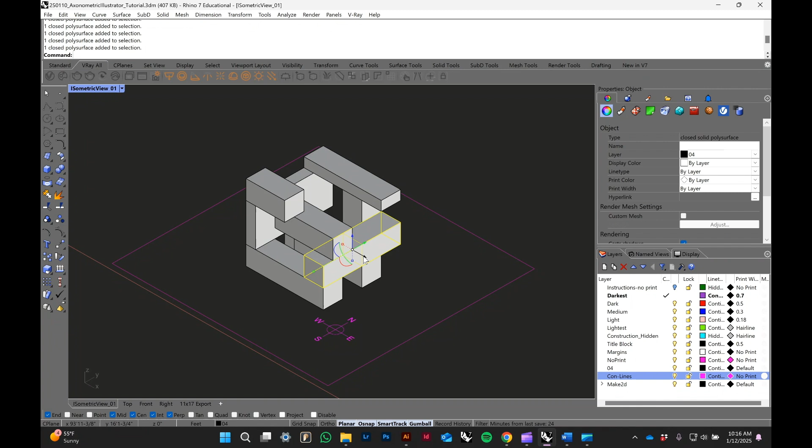But the basic principles are all the same, and it all kind of rests on the Make 2D tool and using different and multiple Make 2Ds. So I think these two objects here are what I want to pull out. So there's a couple of things I'm going to do. First, I'm going to option pull out to make a copy. And I'm going to option pull out. These will be our sort of floating pieces that we are going to use.

And I am going to hide these two objects for now. And we have this base. So I'm going to go ahead. I'm going to select everything. I'm going to do Make 2D. I'm going to call this Make 2D Solid because these are all of the solid pieces I would like to show.

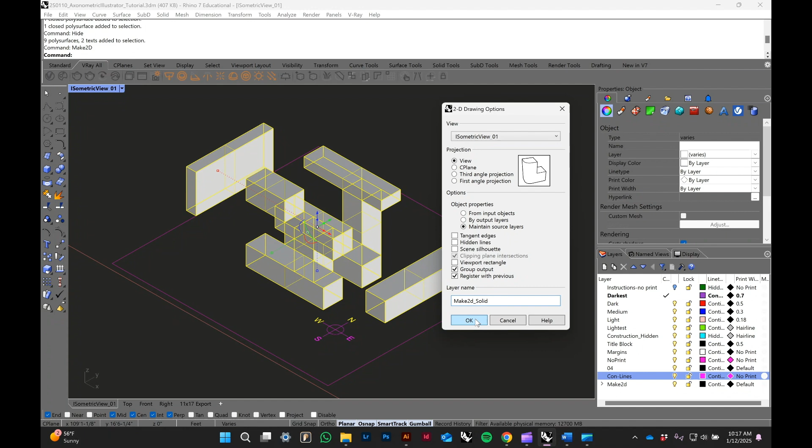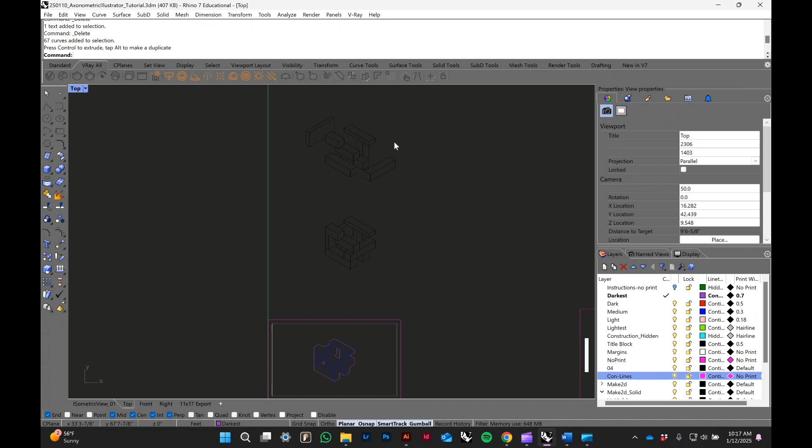We'll go over to top view, and we can see that it is all on top of itself, which is not what we want. So we are going to pull it up and work on it over here. So we got some stragglers happening. I'm going to go back to my isometric view. I'm going to type in show, and I am going to make 2D. Actually, it's a lie.

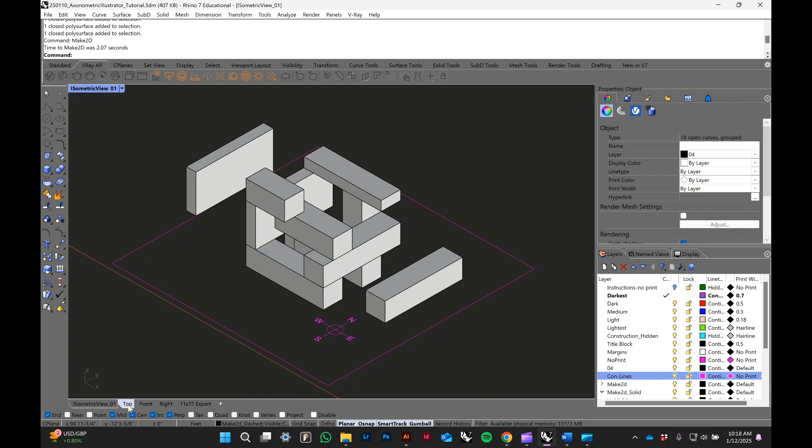I'm going to select these two objects only. I'm going to do Make 2D. And these are going to be Make 2D Dashed. You'll see why in a second. So we're going to go back to our top view. We're going to see these people have moved in, and we are going to simply pull them up on top.

So now, when we come down here, we have three different Make 2Ds. We have our Make 2D Solid, which is the first Make 2D we made. We have our Make 2D Dashed, which is the second Make 2D we have here. And then we have our original Make 2D from the tutorial before.

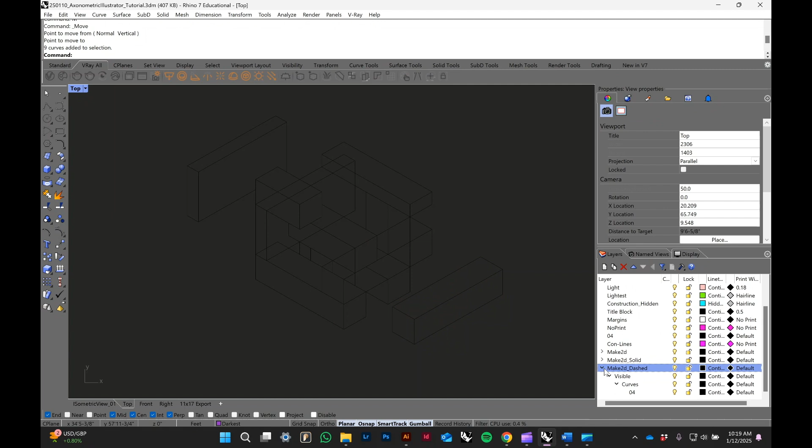So, like I said before, Make 2D is not a perfect system. It will not make the drawing for you. You have to do some work. So what I'm going to do here first is I'm going to work with the Make 2D Dashed. So I'm going to select the objects in layer 04, and I know I want these to be light. I want them to be lighter than the sort of context medium line weight that I used before, this drawing here. So I'm going to put it on my light layer.

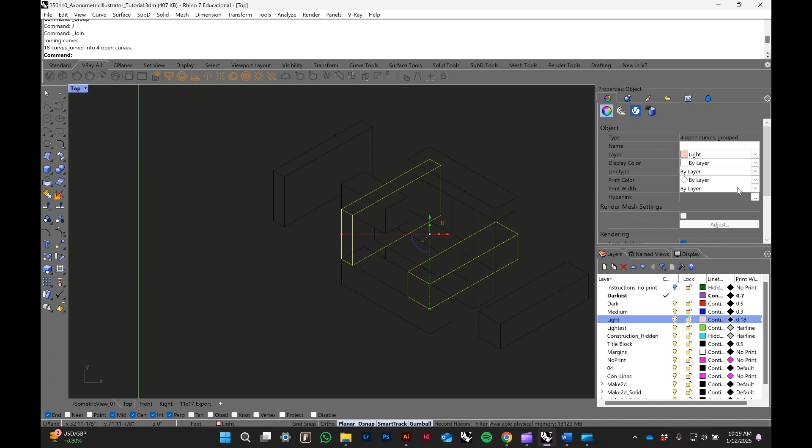I also know that I do want a dashed line. But I don't want a dashed line on the full light layer. So what I'm going to do is I'm going to group these two objects together. I'm going to join all of the lines quickly so we don't have any loose lines in Illustrator. And I'm going to change my line type to dashed. That looks pretty good.

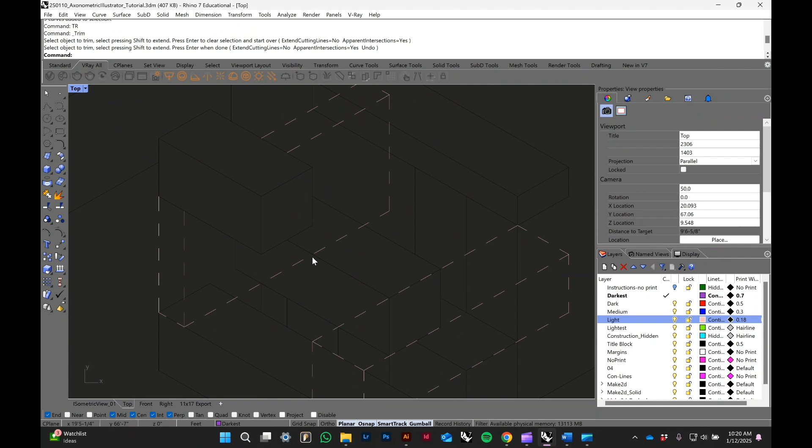I'm also going to come in here and do a little bit of trimming. So the objects that are in front of them, I don't want the dashed lines to show through. So for example, here, clean this up. All right, we're going to clean it up here. And looks like here as well. Okay, that looks right. Same thing down here. We're just going to clean up the lines. Okay, come on.

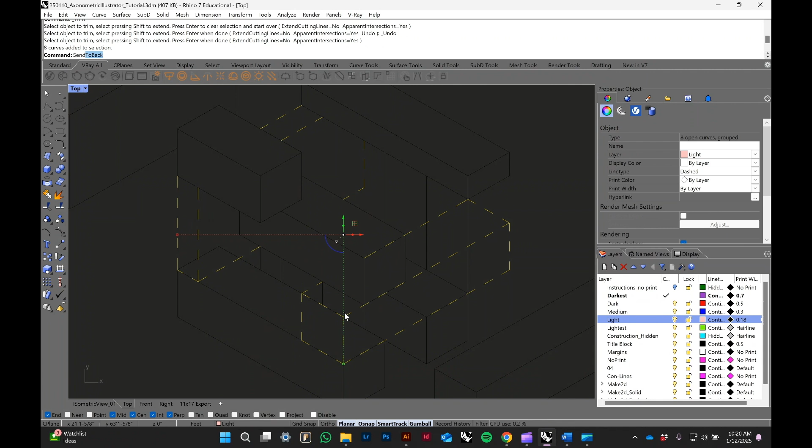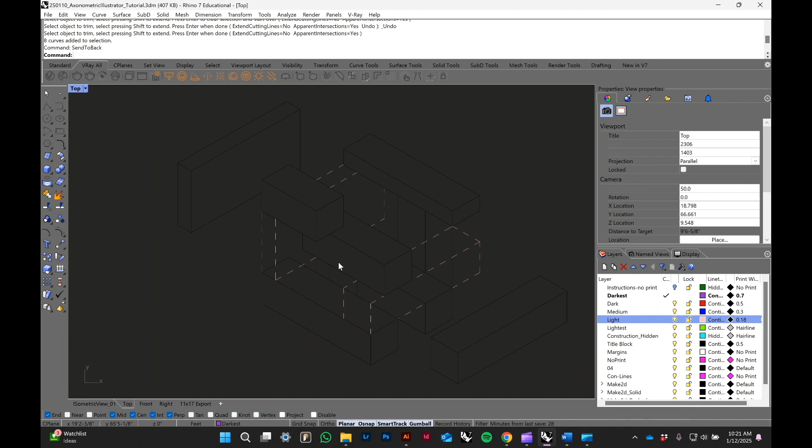Okay, you know what? We're going to leave it. We are going to send these to back. Just like so. Cool. Okay. Now I'm going to go through, and similar to before, I'm just making a very simple outline of the silhouette. So I'm going to jump ahead real quick. Okay, and we are back.

I've gone through and I've line weighted the object, as well as adding in some construction lines. You can start to see how this can shape out, and you can start to get creative with what pieces you're pulling to show different pieces of information. Even sometimes you can start to rotate the pieces out, but it all stems from understanding the Make 2D workflow and how you can start to layer different objects on top of each other.

Once you hop into Illustrator, you can start to play with the layers and how the live paints are layering on top of each other too. So it's really a tool to help express your ideas to their fullest potential.